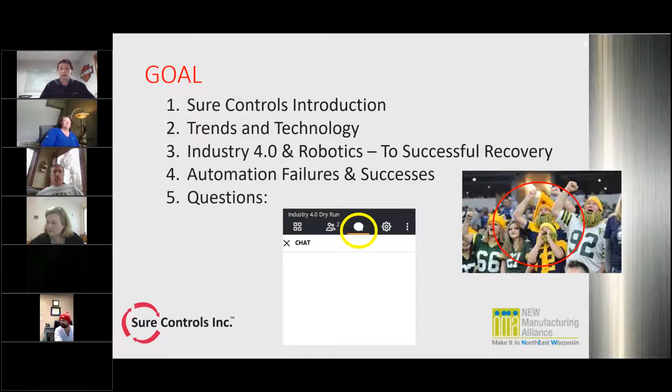A little bit about Sure Controls. We were founded in 1984. We are privately held, located in Greenville, Wisconsin, right across from the Appleton Airport. We are one Sure team of experts, so we really invest heavily in technology, and in order to be in technology, we are heavily invested in training the team here to ensure that we can successfully deploy that. Our mission is really to delight our customers with design foresight, product leadership, and unequaled responsiveness.

The services and solutions that we offer are custom engineered integrated solutions, and that can be full control system upgrades for a machine that's been running for 50 or more years, to a brand new automation process that's being deployed into a customer's facility. It can start with a clean sheet, or it can work off of concepts and systems that we have collaboratively developed with our customers. That tends to be what we see as the most successful solution, is that truly collaborative approach.

We do product distribution for specific product lines supporting our core competencies. We are a UL panel design and production facility.

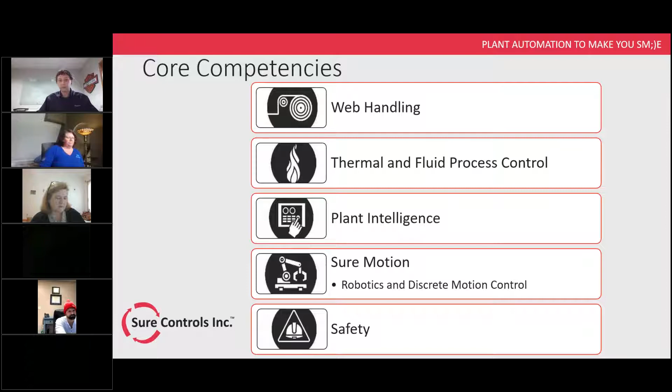So now we'll get into the trends in technology. I really have to start with where I grew up. I grew up on a dairy farm, and if anyone on this call had that type of background, by no choice of your own, you got to learn what it meant to work at an early age. I baled hay, I drove tractors, and I truly enjoyed everything I learned. I learned how to take a lot of things apart, but I also quickly learned it's a lot of work to do everything manually.

Within the manufacturing environment, agriculture is a different version of manufacturing. And I quickly realized when I left for college that I got automated in the process. Since there weren't enough of us on the farm to do all that manual labor, we got automated through the use of skid loaders, which I love driving, especially when it can pick up the equivalent of 100 square bales all at once.

Really the key here is that for a very long period of time, we've been collaboratively working with machines that are automating a lot of different things around us, whether it's in the automotive industry or the agricultural industry. The technology in the agricultural industry has autonomous tractors and things that are very advanced, because it's very difficult for them to find people to do the manual labor required in that industry.

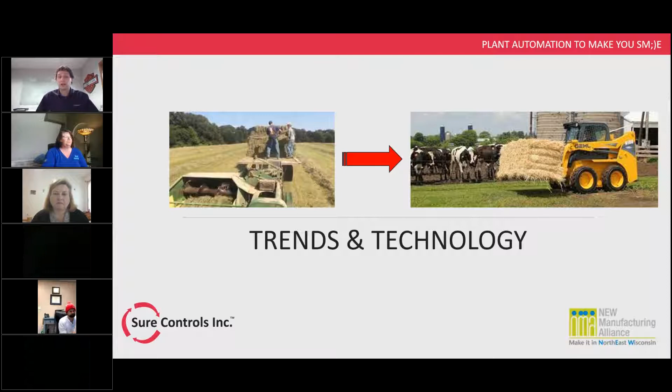We'll get into collaborative robots as the technology, and I wanted to share that we're all exposed to collaborative technologies every day. Every time you get in your car, your window is an electromechanical collaborative system that's engineered to be safe, so that your loved ones and yourself don't hurt themselves should they roll up the window and have one of their appendages in the way. Just an example of how we are around technologies all over that make sure we're comfortable with that.

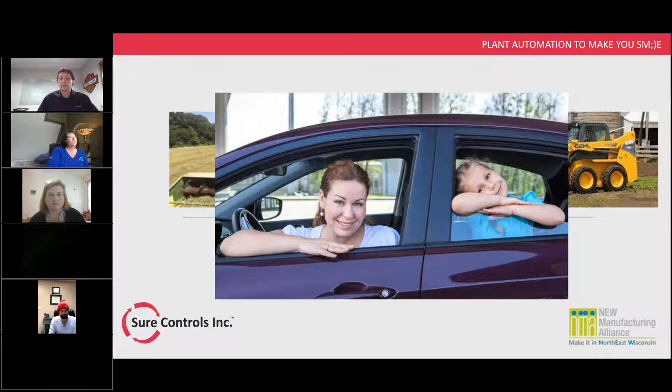Same goes for elevators - I'm sure every one of us has been on one, and if you have kids, you've probably had one of them stick their hand in the door to see if it would open back up. That is no different than the window on your car. It's designed inherently safe to protect someone from being harmed - again, a collaborative engineered system that is going to keep the operators safe.

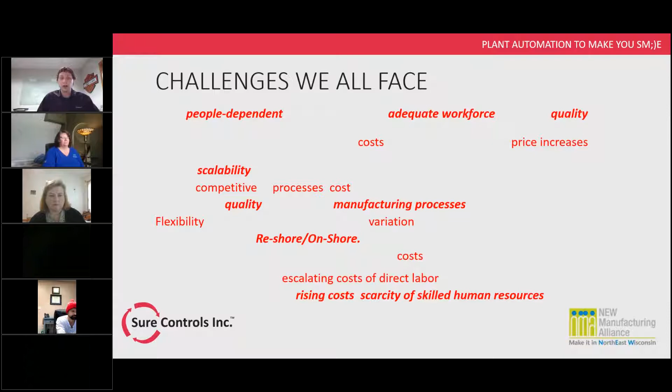Some of the challenges we all face - I drew out different words that were submitted in the questionnaire that was sent out, and some that were really highlighted were: people dependent, adequate workforce, quality, reshore, onshore, rising cost, scarcity of skilled human resources. I'm not going to read all of them, but I draw that out to highlight these were the actual supplements or submittals from that survey. It's on a lot of our minds as to how do we manage the challenges that are in front of us.

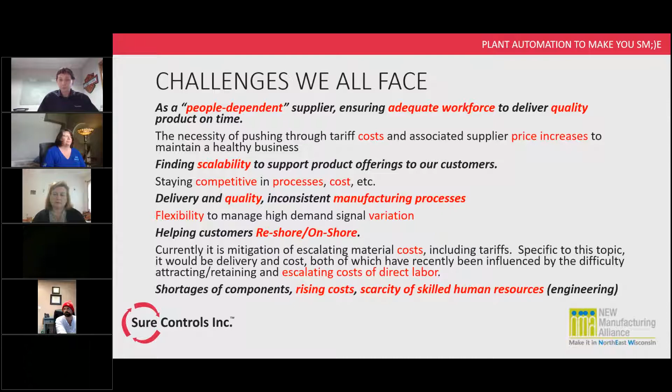And this doesn't even put in place the pandemic related challenges. That's going to roll out a whole different level of things we have to adapt and manage to. The one amazing thing is how quickly we have adapted, and the exciting part is there's going to be lots of innovation that comes out of this if we're applying ourselves in that fashion. So I thank everyone for providing this, and really resonate and can share that the manufacturing facilities we visit throughout the state and around the country and world are challenged with these same issues, and look forward to sharing how we believe we can help solve them.

So I don't have any takers, so I'll give you a little hint. What I did was Google every company that is part of the Industry 4.0 sub-team, and there are currently 4,547 open job positions, and that's currently through a pandemic.

Now, maybe some of these still need to be updated, but I know even through the website of the New Manufacturing Alliance, there are companies on this subcommittee having even higher demand than before, and labor shortage was a huge challenge before that. The reality is there's more people retiring than entering the workforce, and that gap is resulting in us needing to come up with ways to do more with less, which is also going to allow us to stay competitive locally.

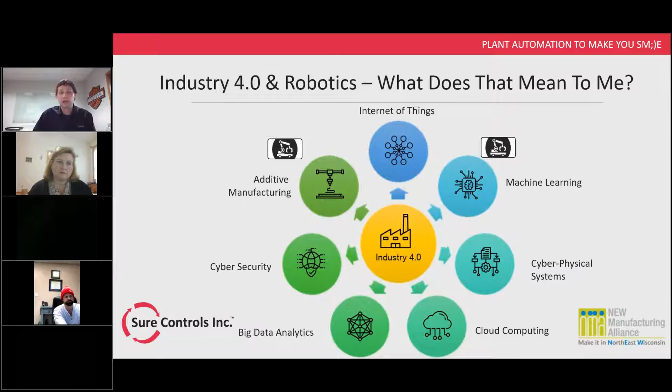So I'm not going to dive into Industry 4.0 a lot, but I felt this was a good graphic that has a lot of the prongs and really where the robotics element ties into it.

So we work with an end-of-arm tooling partner called Robotiq out of Canada, and they've really done a campaign here during the COVID-19 pandemic to focus on what they could do to help deploy collaborative robots to help keep manufacturing going in times where it's challenging to get operators that may not want to come to work or where we need to separate folks from coming into the facility.

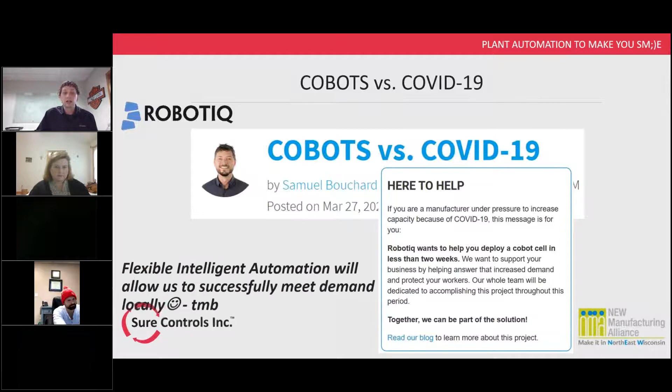So they've got a campaign where if you work with them as partners, they would come up with an assessment of different applications within your facility and help determine not fully automating something, but looking at how you automate, say, 80% of a process so you can start getting the return. Recognize that the technology is flexible and intelligent, so it doesn't have to be purposed specifically into a process. You can then redeploy it into the future without having to fully recapitalize buying new equipment.

So this is some of the technology that is very important and useful. When you deploy this, you can dial into the equipment and extract information from the process and the equipment running the robots, and the in-feeds and out-feeds from the system, to know if you're creating bottlenecks in other places within your facility.

You can set a pace for a line if you incorporate a robot that is operating at a specific piece part pace. An operator may be able to work faster in a burst, but not sustainably. So a lot of companies have added automation and different types of technologies that help them better manage the consistent workflow through their facility.

I thought this graphic was very relevant, to just ask the question: what will the new normal work cell look like in the next 6 months, 12 months, 3 years? There are lights-out operations that exist, but I'd say that's more of an outlier than a norm. Will social distancing be a new norm? The key is that there is automation technology that exists that could solve these challenges if they become more of a long-term issue.

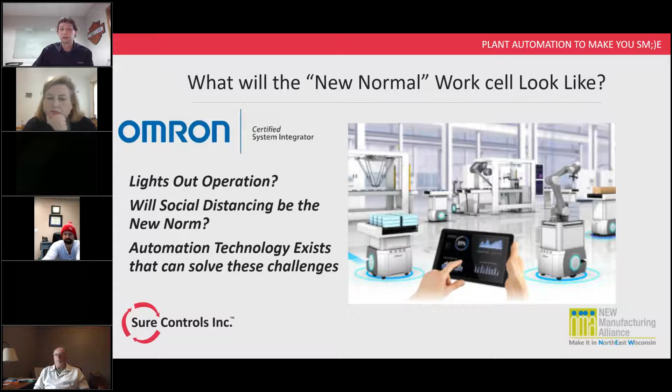All this is being drawn into a place where you wouldn't have to be at the facility to see what's going on. So this is basically the equivalent of all of us sitting at our computers outside of the building, knowing exactly what's going on within the facility. So again, tying the robots to plant intelligence or Industry 4.0 so that we can better manage our businesses.

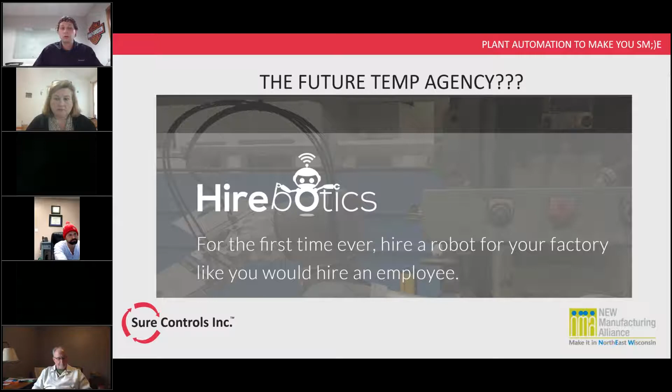Another technology that we don't participate in but does exist is companies that have started hiring out robots temporarily. Think of a temp agency, but you're effectively renting a robot as your peaks and demands are out there. This may not be for everyone, but it's no longer a capital investment—it would be more of a monthly expense. Since these technologies have a quicker return on investment, you're starting to see different business models being brought to market to allow more people to take advantage of it.

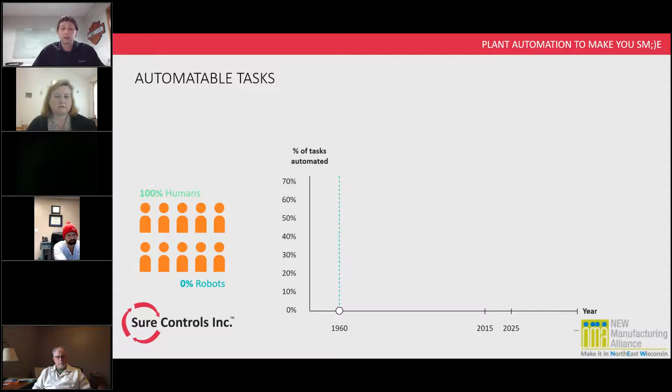This slide has a lot of information, but really, in 1960 is when the first robot was introduced to the market. From 1960 to 2015, roughly 10% of jobs in manufacturing were automated. Now, that's not to say that by automating, it created more jobs.

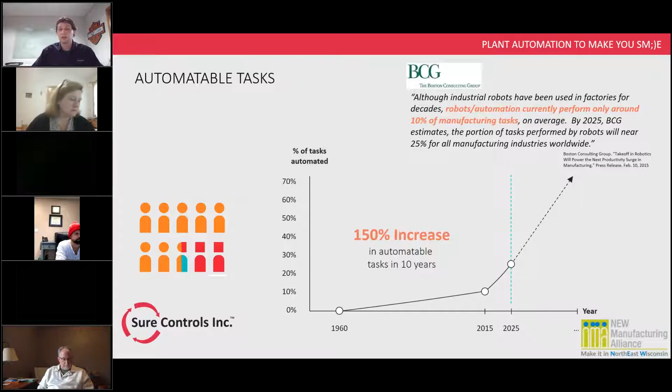There are a number of organizations—one we belong to is the Robotic Industries Association—that indicates that for every robot deployed, there's 5 to 6 jobs created. But basically, over the course of many years, 10% of tasks were automated, and there are projections that from 2015 to 2025, they're looking at a 150% increase in automatable tasks. A lot of that is automation moving outside of the auto industry, because of new technologies that don't require the significant investment that it had in the past.

So some of the things we'll get into now: in the past, say from 1960 until 2015, industrial robots were the primary robotic automation deployed. All of them needed to be caged because by themselves they are not designed safe. They're designed to do the same thing over and over for a very long period of time. They are expensive, and it's fixed—meaning you can't redeploy those systems.

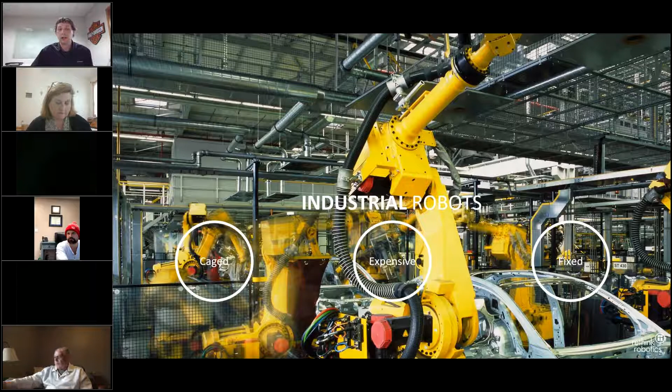They're designed to run, say, one model year of car, and when that car is no longer produced, a lot of that equipment is sold off and scrapped, and they need to reinvest in retooling the whole manufacturing facility. There are new technologies now that allow you to take investments you've made and redeploy them. We like to term that within Sure Controls as flexible automation.

So we'll get into now a little bit of what is a collaborative robot. These are just a couple videos.

Precise Automation is a manufacturer out of Fremont, California, a US manufacturer, which produces the fastest and safest collaborative robots on the market.

You're also able to mount it on a linear rail, so you could manage multiple operations with a single robot. This video just shows how it's designed to work very closely with an operator and not harm them.

So it can't handle high payload. If it's a high payload operation, a technology like this is not the right fit. And if it has to be extremely high speed, again, this is not the right technology. You would lean more towards fixed automation, whether that's an industrial robot or custom designed automation.

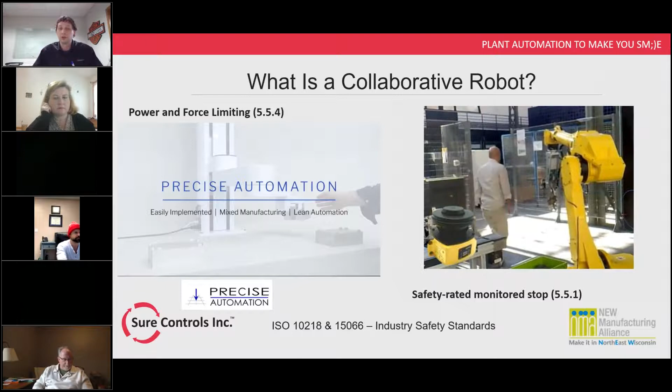Here you're going to see when he moved out, it's moving full speed again, and now he's going to try and run into the work cell. Just because you're moving quicker as an operator doesn't mean that the safety is going to be defeated.

And all of this is defined by specifications written by ISO and the Robotic Industries Association. There are ISO standards and RIA standards that define how you need to safely deploy automation and robotics, as well as the types of risk assessments that need to be made, whether it's industrial or collaborative.

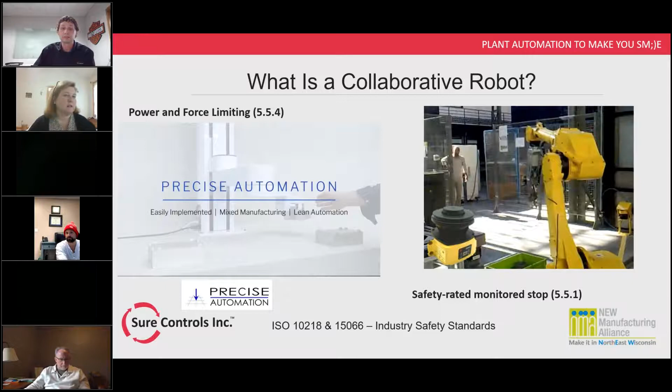You have to do a risk assessment. This slide here highlights that there have been a lot of studies done to determine what it means to be collaborative.

If you've ever put your hand in an elevator door or closed your fingers in a car window, you feel that. So just because it's collaborative does not mean that you're not going to feel the robot coming into contact with you. You will feel it.

There were volunteers, hopefully paid, to be studied on how much pressure could be applied to their chest, their temple, and different parts of their body to come up with the safety standards. A lot of work and studies have been done to determine what is deemed a safe collaborative deployment, and you need to ensure you're doing the right due diligence, whether deploying it yourself or working with a partner. Risk assessments are required to be completed.

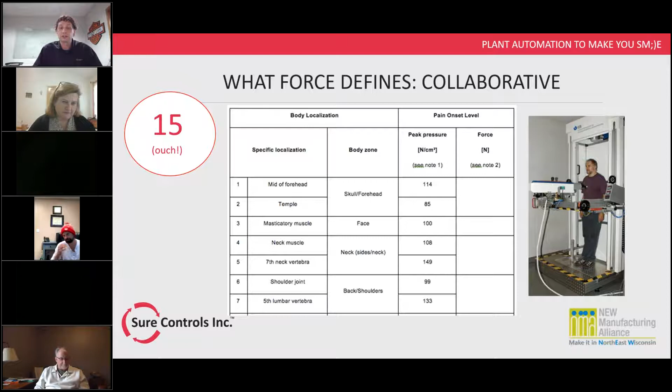So there are lots of different deployments that collaborative robots have been used in. Typically, they are faster to deploy and easier to use, which we covered in the earlier video.

They're flexible and can be redeployed. You can add vision systems and other technologies that even enhance what they have designed into them. They're safer by design, but still you need to do the due diligence as you're deploying them.

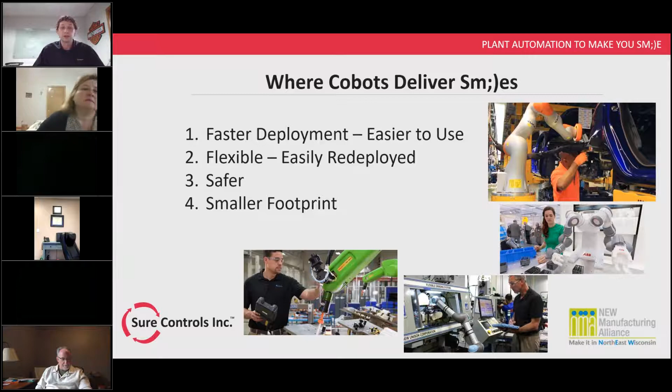If you put a knife in the end of a collaborative robot, obviously that is not a safe deployment. Smaller footprint—when you don't have these large heavy payloads and you don't need guarding around the system, you typically can fit that into a smaller footprint, so you save real estate within your facility. And last but not least, and possibly more important, is in a lot of cases we've found that there is...

A faster return on investment, and we pride ourselves and recognize that you do not get that return on investment unless it is fully deployed and operating in production. That's really important, as you're investing in these technologies, that you are getting it deployed, because that's where you are getting the return on the investment.

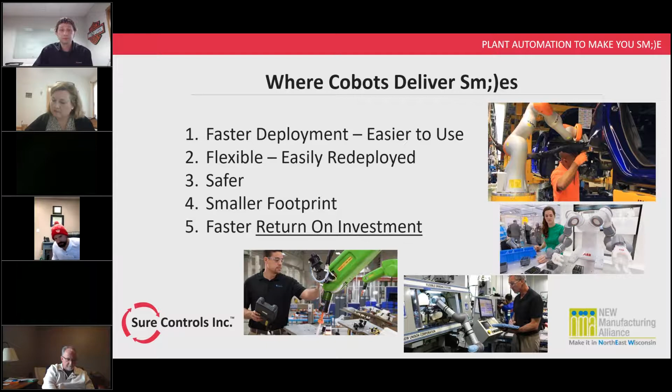So just comparing, say, an industrial robotic deployment—here you have robot, peripherals being panels, guarding, end of arm tooling, system engineering to bring all that together, and project management. A basic collaborative robot, you're still going to have the robot cost, but your peripherals will come down, your system engineering will come down, project engineering, project management will come down.

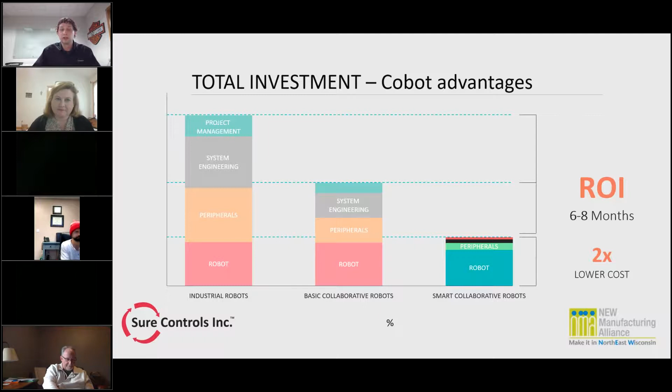And then a smart collaborative robot would be a robot that's combining a smart vision system or a flexible in-feed system, things that allow that to be quickly deployed and quickly redeployed, allowing for you to see returns that we've had customers capitalize on in months versus years.

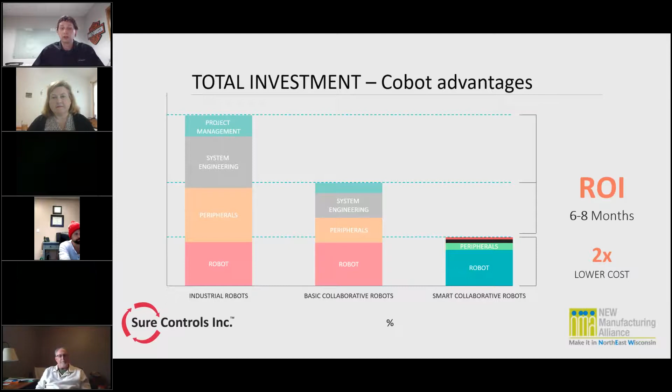But again, all of that's dependent on how many shifts, and we've got many different ways that we work with customers to analyze that, and everyone has their own way of determining what return on investment makes sense for their business.

Something that always comes up is: are robots and automation for every application? The answer to that is absolutely not. I don't know if there are any Tesla fans or owners in the audience, but Elon Musk—I give him a lot of credit for setting very aggressive goals and pushing the boundaries in a lot of different industries, and he's proven himself to be very successful.

As he went to deploy his Model 3 production lines, he was looking to ramp very fast and automate as much as possible, and it really did not go well. Human dexterity and a lot of things in the production of a car—and in the production of probably everyone's products on this call—are required.

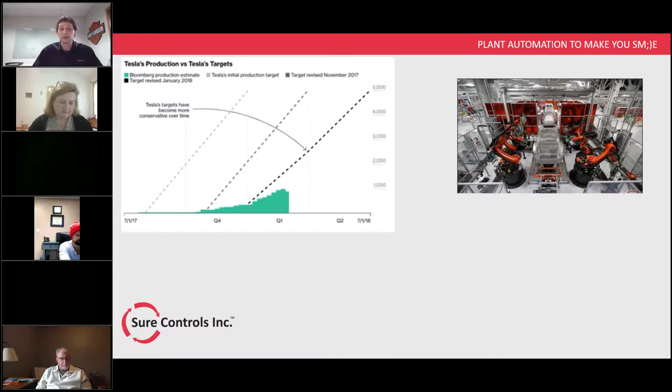To get to a lights-out opportunity is very difficult. It has to be engineered to the design of your products, and typically isn't a realistic goal. So the net result, if you followed any of that, was...

A makeshift manufacturing plant that was fully staffed by people to get production up and running, because they couldn't get the automation to all be working together and deliver on what was needed for throughput and commitments to the market and to their shareholders. So it was interesting to see that, especially being passionate about automation, but there are things that you need to make sure you're taking into consideration.

And when you try and tie your whole facility full of automation together and bring that all online at once, it's very challenging to do that.

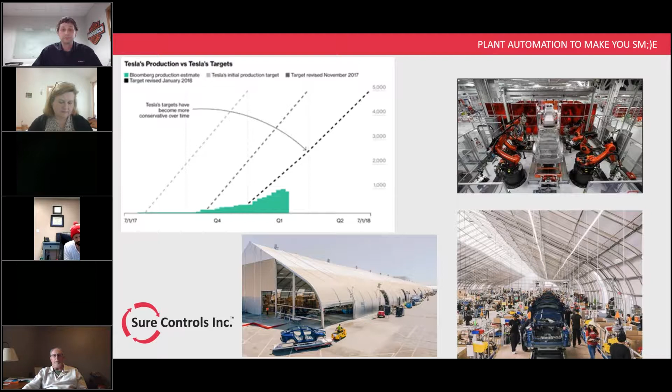So here's a deployment that has been done here locally in Wisconsin—this is down in New Berlin. Just wanted to share this success story of a blow molder that's had a successful deployment.

We've been looking for a collaborative robot solution for quite some time, mainly due to the labor shortage that most manufacturers are seeing today. The collaborative robot allowed us to deliver a more flexible solution, and it's a lot more redeployable.

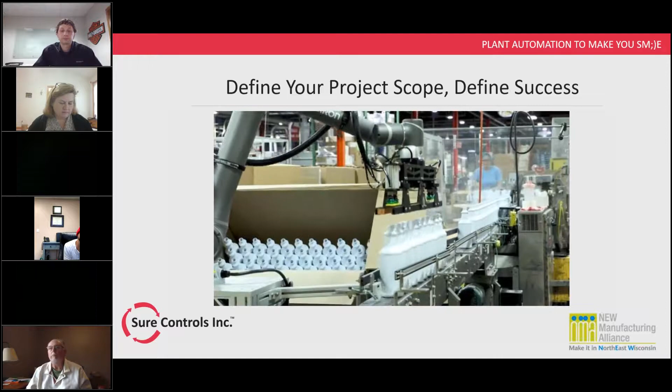The application that we really went for here was on our offline label application, where we could get better consistency, more reliability, and really set the pace to produce to our schedule. We didn't have to worry about having to shut the line down due to labor inconsistencies. So it's been a great opportunity for us and worked very well so far.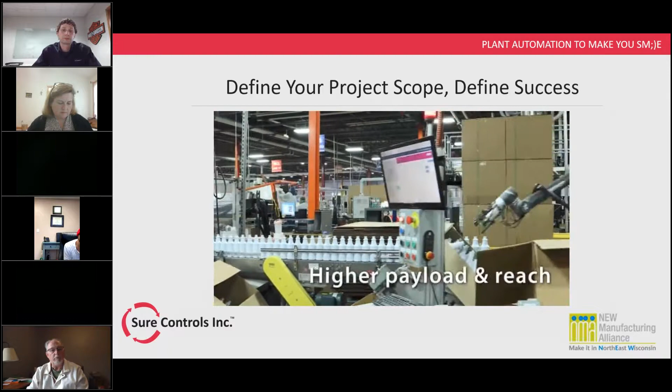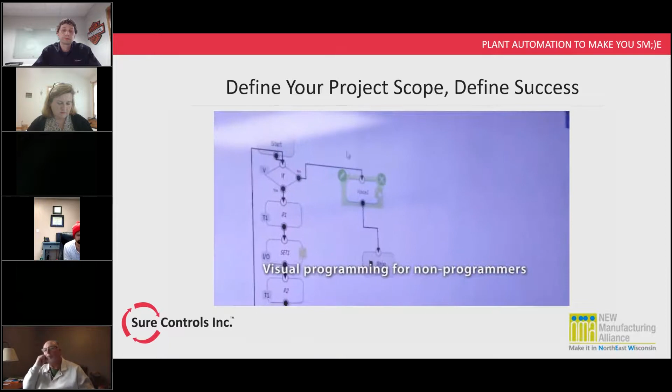We went forward with using the Omron TM robot for some of the technical advantages. We also felt that higher payload and reach was a need that the market was looking for and asking. And really the technical team felt the programming capabilities within the product were an important piece.

So we partnered with Sure Controls on the deployment of this, and they were a great partner for a variety of reasons. Project management was one, their technical expertise. They provided a lot of extra training for us, and they really helped sell us on the technology and how it can benefit us.

We've been looking for a collaborator, and that's just one of the companies we were fortunate to work with and who was willing to share their story. What they had was an offline manufacturing process they couldn't keep staffed. When folks called in, that part of the facility would shut down and they'd have to work overtime, for labeling of blow molded bottles. In that industry, needing to add labor into the production process ends up impacting your bottom line.

This video has a number of different technologies tied together to demonstrate them working, highlighting technologies that can handle very, very small parts. This is an area we work in as well, more for the medical and electronics industry.

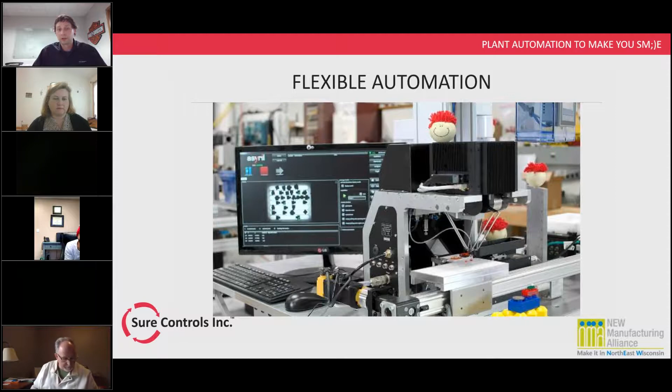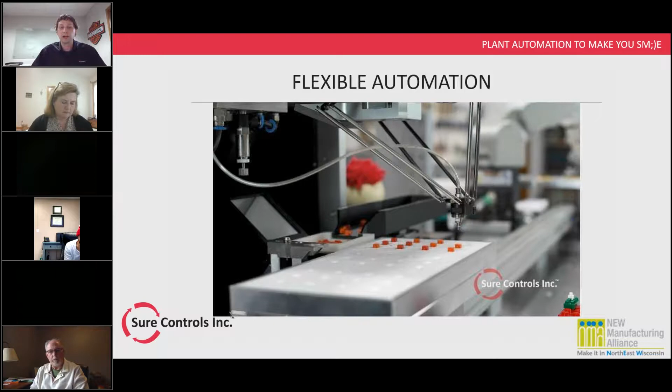This is a Delta robot that has 2 micron repeatability. The parts being handled here are nano blocks, the smallest Lego we could find, though we work with parts much smaller than that. It's a flexible in-feed that feeds these parts in, and the flash of light there is a vision system telling the robot where to go.

The flexibility is built into this in-feed system, so you could load in different parts than these nano blocks, and with programming and retooling at the end of that robot, run a completely different part on the same system. That would be the case here with this robot as well.

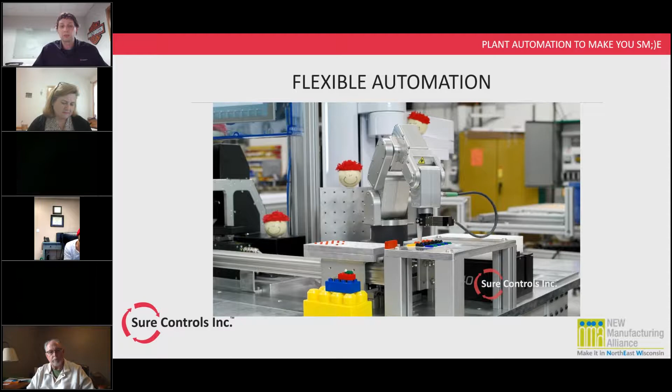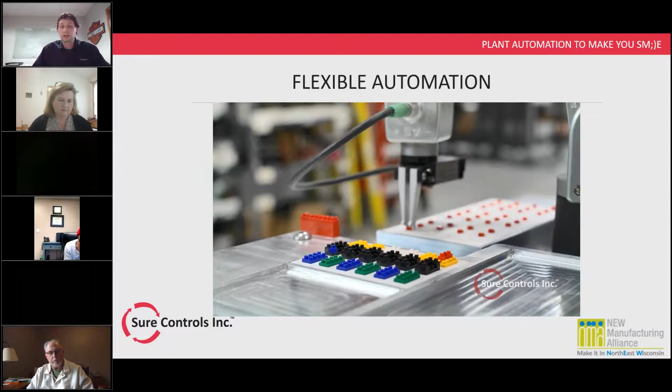It's a 6-axis robot from Mecademic, a manufacturer out of Canada, where you can hold that robot in the palm of your hand. It doesn't work for every application, but for highly precise applications that need to fit into a small footprint, it works very well and can do things very few other technologies on the market can do. You can redeploy these by simply redesigning the tooling and reprogramming the robot.

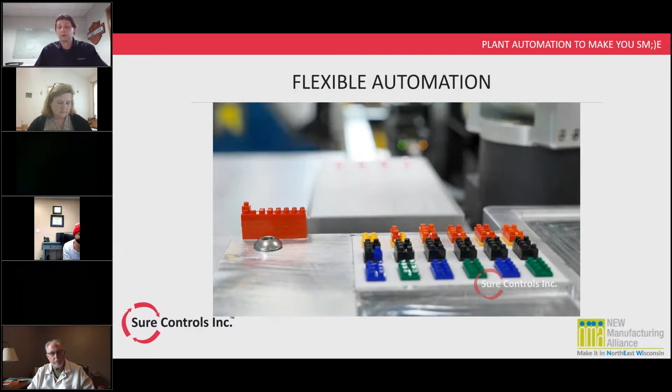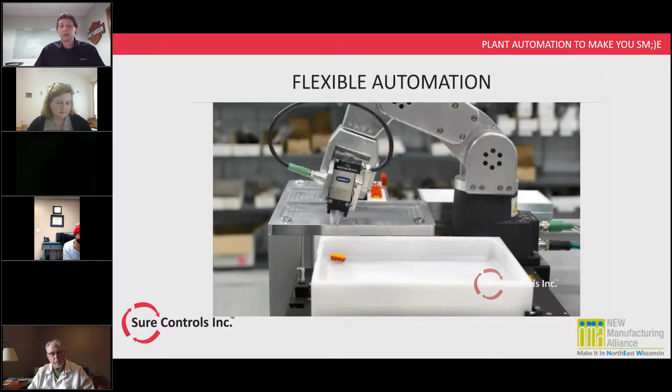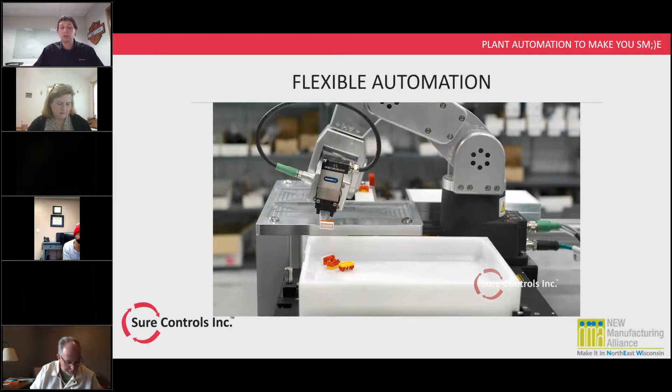It then passes the assembled nano blocks to another flexible feeder from our partner Asyril out of Switzerland. If you've been in a manufacturing facility with those really loud bowl feeders, this technology replaces them, since bowl feeders are noisy, jam frequently, and have lots of issues. You can change out this tray and change what parts are managed simply by reprogramming the system and retooling the part that's picking it up.

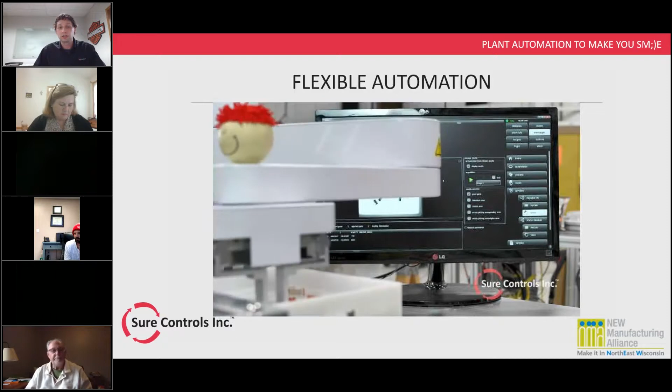In this case, it's a collaborative robot picking that up. It can be retooled inexpensively at the end of arm tooling, then you reprogram the in-feed or out-feed, as it's both in this example, and redeploy all of these technologies without having to buy all new systems.

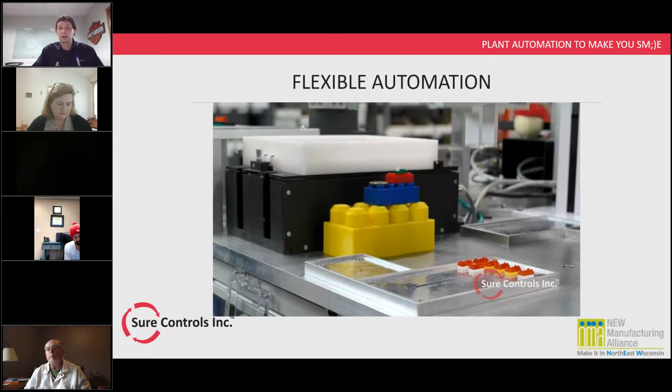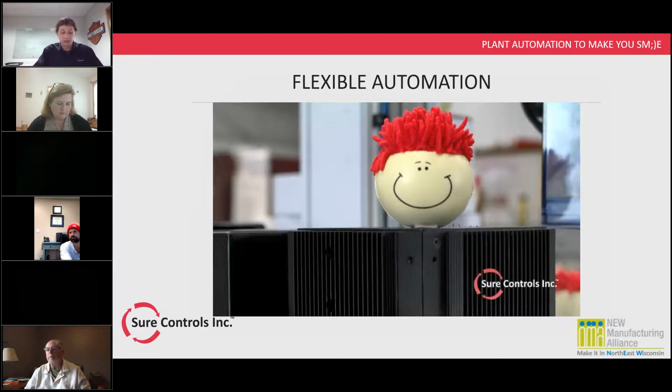These are just examples of how flexibility can be built into automation, giving you options as you make that investment, not only for the current ROI calculation and capital investment, but for future investments you may need due to different customer demands, changing product mix, and things of that nature.

And then we'll end by getting back to kind of the roots of where we started. You'll notice the Amish buggy up here. We deployed a multi-axis, in fact an 18-axis, electromechanical, fully automated system for cheese brining.

For those not familiar, brining is the process of soaking large blocks of cheese in salt water during production. This adds that great salty flavor we all like, and it also adds weight, so since we're paying for cheese by the pound, we're paying more for not just cheese, but also the weight added during the brining process. This deployment was done in Pennsylvania, and it was, I believe, owned and operated by Amish.

The interesting thing is that they're investing in fully automating systems like this to stay relevant in the manufacturing environment, even when in their personal lives there's very little, if any, technology being utilized.

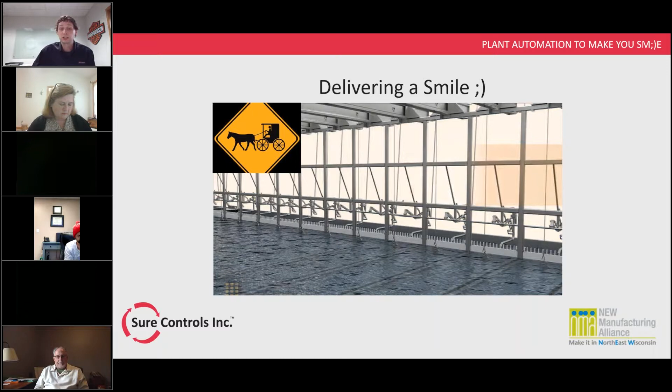So it's really interesting to see that the technology is being utilized and deployed by lots of different folks, regardless of their background. It was a unique opportunity. One of our engineers was actually online with this system remotely this week, troubleshooting and updating the logic inside the PLC controlling the whole system, being able to remote in and help service the customer more cost effectively, and in a pandemic, much safer for both them and the team dialing in.

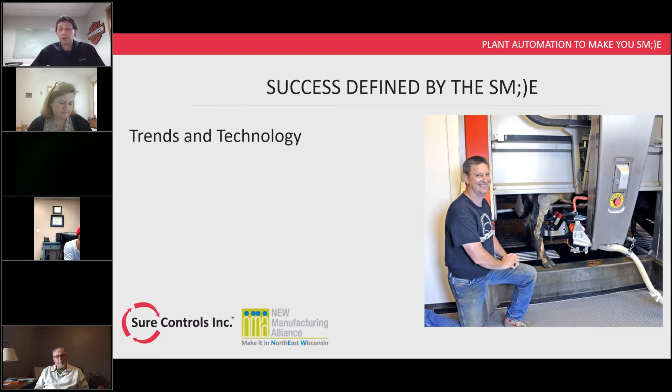We mentioned that we define success as delivering a smile. This is something I tried convincing my father to invest in when I was much younger, but being a conservative farmer, he never moved forward with it. In the agricultural industry, they've had robotic milkers for 15, possibly 20 plus years. I have to believe that's why that gentleman is smiling that much, because he doesn't have to get up every morning and be home every night to milk the cows.

Hopefully I've been able to share some trends in technology and cover my perspective and the perspective of folks here at Sure Controls on Industry 4.0, and how that ties into robotics. We listened to an economic forecast from the ITR group out of New England that indicated automation is going to be a big part of our recovery out of the recession we're in.

A lot of that has to do with being able to build, produce, and manufacture product here locally, and to do it cost effectively. With the labor shortage we're challenged with, we're going to have to come up with ways to manage that. We covered automation failures and successes, and went into some flexible automation. If you're looking at automation, I'd highly encourage thinking through not only what you're looking to automate at that task, but potential future tasks, as that would be a long-term investment that could be redeployed in the future.